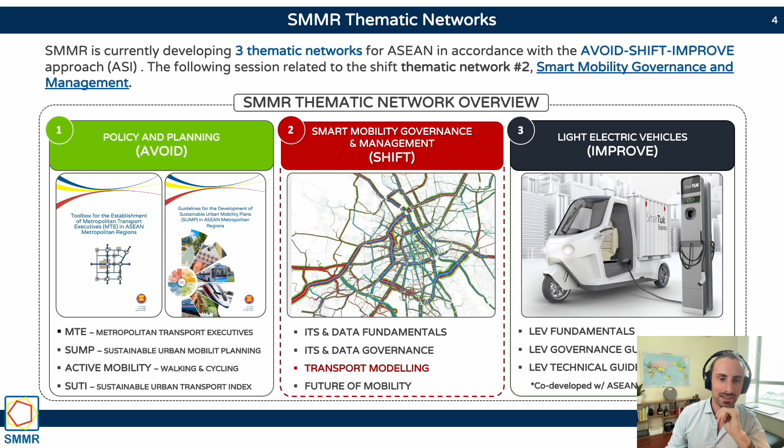So let's get into the modeling webinar. Today we will introduce you to modeling. We will cover theory and look at some practice, in three different steps: what is modeling and why it's important, modeling use cases and case studies, and data requirements. Then Paul and Sharan can also give you some insights into the user interface and other PTV tools.

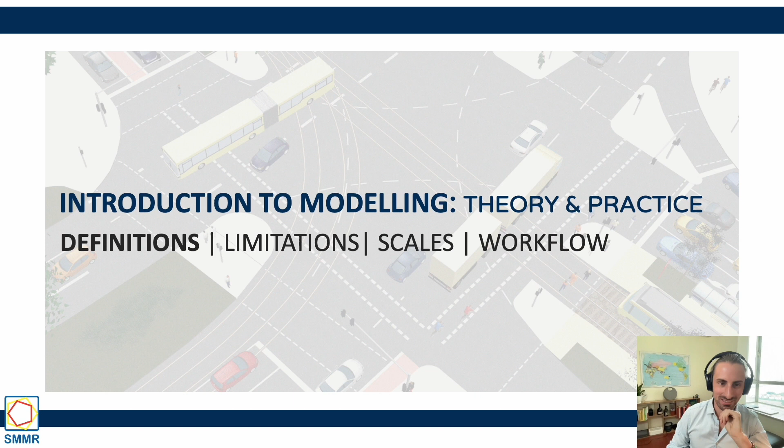Let's start with the very basics, covering some key definitions. So what even is a model? You can give it some thought, any ideas? Essentially a model is a representation of an object or system, a simplified version of something, and we come across models all the time.

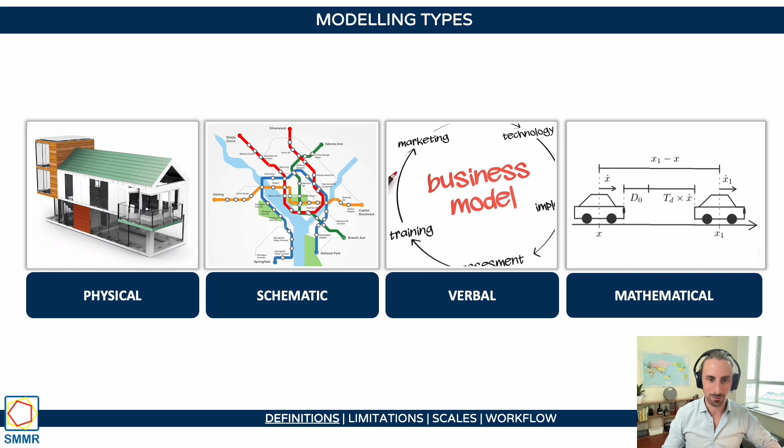There are many different kinds. We have physical models, which could be an architectural mock-up, or schematic models, like a public transport map, which is a representation of the real world public transport system simplified into a map. We have verbal models, like a business model, which is a representation of a business written up in a verbal document. And then we also have mathematical models, which is what we'll be looking at today. I don't want the word mathematical to scare any of you. We have excellent tools that mean it is possible to develop these very complex models without using any complex mathematics.

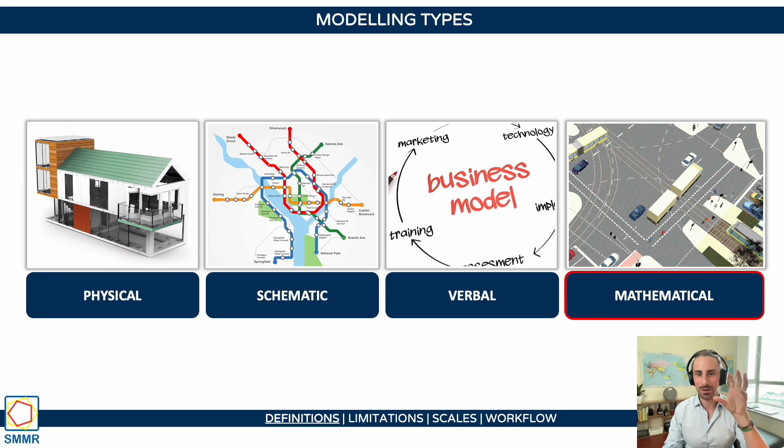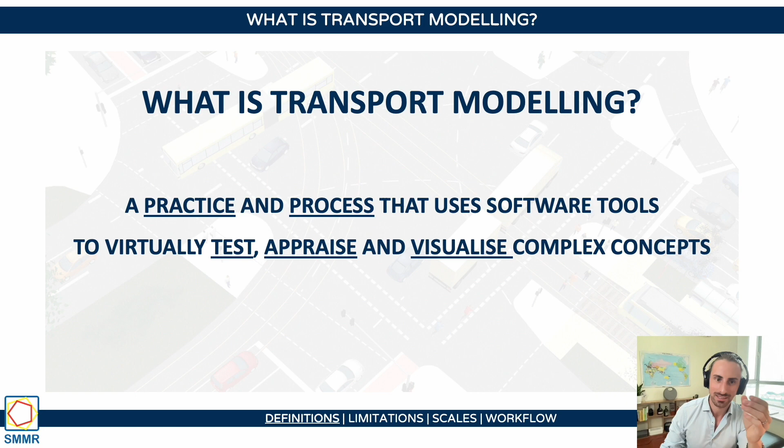But mathematical models make up transport models. So what is a transport model? One definition is it's a practice and process that uses software tools to virtually test, appraise, and visualize complex concepts. That's very useful - the world is becoming increasingly complex, and if we have tools that help us find comfort in this complexity, that is a good thing. So why do we model transport?

To find comfort in complexity, or the more academic explanation, would be to balance the supply and demand of transport systems in the present, but more importantly in the future.

You can get a general idea of this, at least from a transport perspective, using a modeling solution. But also using this solution, you can design, test, appraise and evaluate different concepts and solutions to absorb the growth in demand. For example, you can increase the supply of road infrastructure by adding new roads or new lanes, or preferably by increasing the amount of public, bus and rail-based transport. All of this can be done in a modeling solution.

It's worthwhile saying modeling software is not cheap, maybe compared to GIS tools, or you might be familiar with the price of Photoshop. These are far more technical tools, and they do sound expensive, but they are significantly less expensive than making mistakes. Road building and infrastructure construction is very costly, and mistakes can cost. So it's really worthwhile making use of these tools so you can test, define and refine your concepts all in this virtual environment.

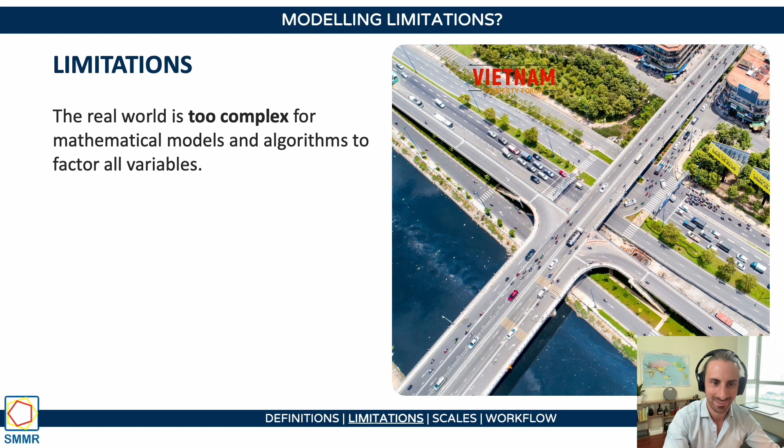But modeling isn't perfect. There are many limitations. The real world is very complex, especially in the ASEAN region. Mathematical models and algorithms can only go so far. They can only factor so many variables, but the real world is really so complex. This is an aerial image from Ho Chi Minh City, and if you've been there, there's a lot going on. Creating a model that factors all that is challenging, but it is possible.

These tools are continuously improving and can be increasingly customized to reflect different realities. But at the end of the day, these models remain only approximations of reality, even though they're always improving as we get better at collecting data and building and increasing the precision of our models. Despite these limitations, we have to consider the risk of not modeling. Really, models are not perfect, but they're the best thing we have available to us today to make these big, complex decisions. That's a little bit of theory.

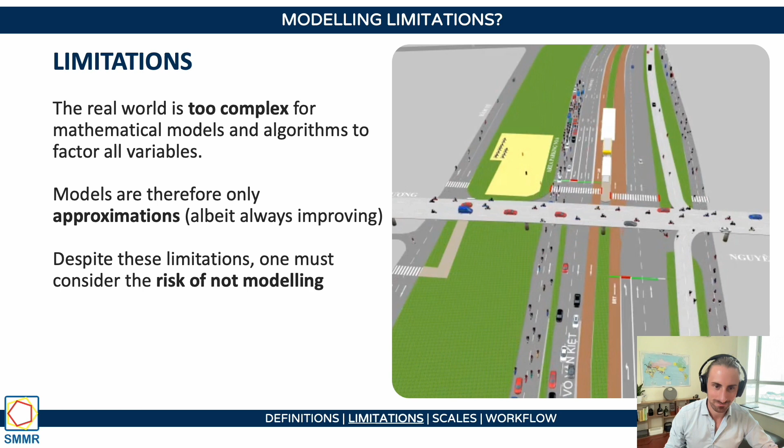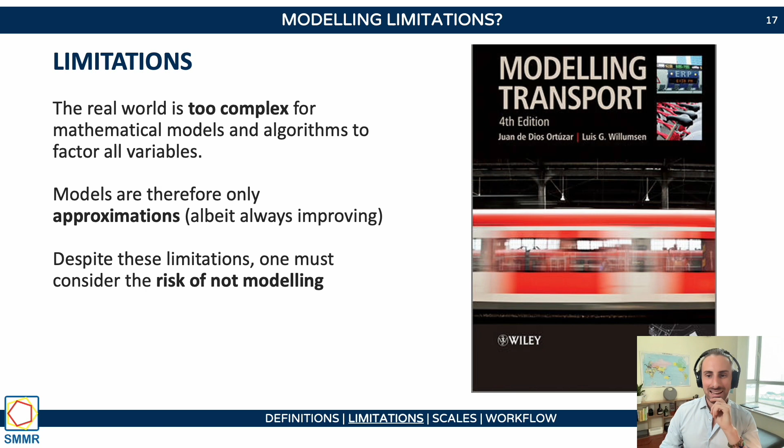These models are usually link-based. All the information is stored in links. You don't see agents, vehicles, anything like that moving around. It looks a lot more like a GIS interface.

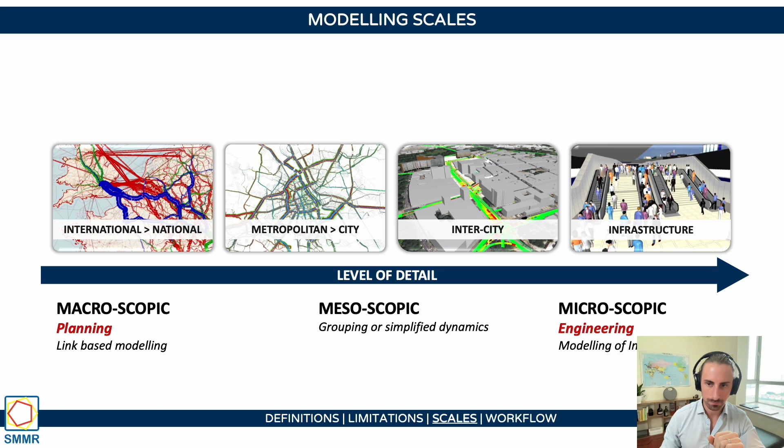Then if we move down the scale, we have a mesoscopic scale, which I won't go into detail on today. And on the other end, we have the microscopic scale, used for transport engineering purposes. These are also models, but commonly referred to as simulation tools. In these models, we model individual agents, and I'll explain that in more detail in a few slides.

PTV, who is here with us today, has different solutions for all the different scales. There are many companies out there, but PTV is the only one that has the whole suite of software across the different levels of detail. The solutions are more or less integrated, so Visum models can be imported into Vissim, and Vissim and Viswalk can coexist in the same interface. It's nice, and you can have a good workflow between all these different solutions. I'll show you another example of that later on as well.

So just to make it crystal clear, Visum macroscopic modeling for planning purposes is link-based, or also node and zone-based. The link is essentially a road, a piece of road, a line in the software. A node is a grouping of lines, and a zone is a larger area, a larger grouping. You'll hear these words throughout the presentation. Then on the other end of the spectrum, we have PTV Vissim for transport engineering purposes.

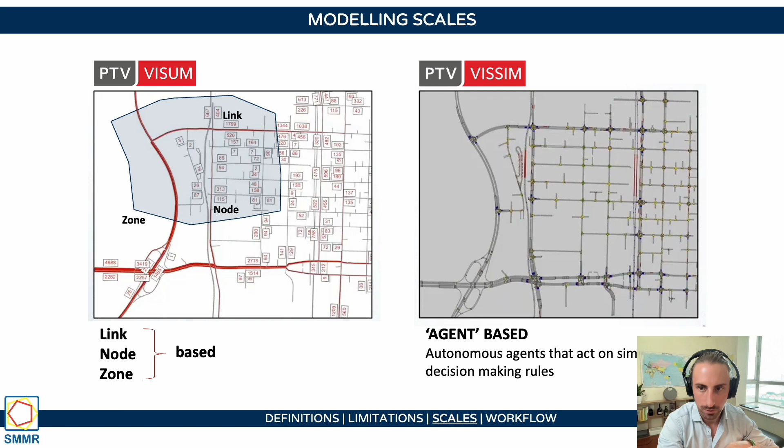That is agent-based, and agents are autonomous agents that act on simple decision-making rules. So you have literally individual people and vehicles, and they move around and adapt to their surroundings. So it's much more granular.

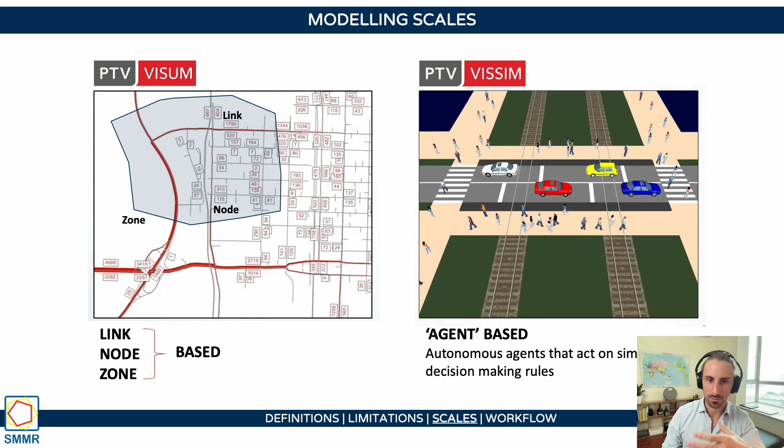Both macroscopic and microscopic modeling have their own workflows, but they can be simplified and can be very similar. The typical transport modeling workflow looks a little bit like this.

Here we have a hypothetical project location, and you are the planner, the designer, or the engineer, and you are asked to improve this particular location. It's a roundabout that looks a bit like an island. It's nice, but I'm sure it's not very pleasant accessing this piece of public space. Once you're there, you can hear traffic the whole time. So maybe there are ways it could be improved. Say that is your job.

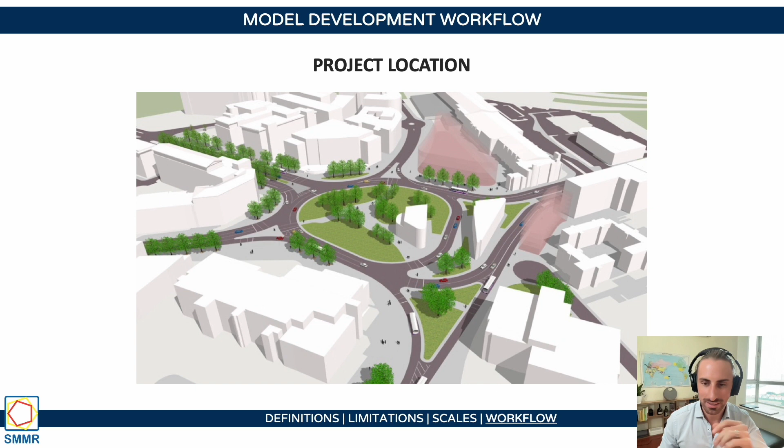The first step for you is to develop a vision of how the space could be improved. Your vision could involve improving pedestrian mobility, beautifying the space, giving public transport priority, and improving the ambient air quality in this particular location. And how can we do that?

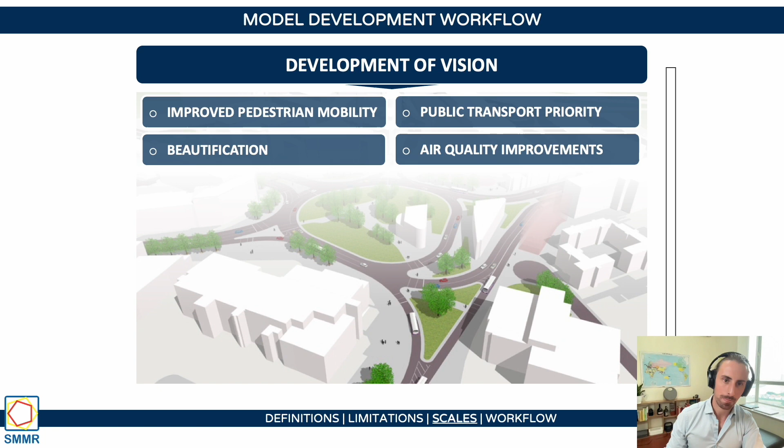Well, the next step is to build the base model. A base model is essentially a model that reflects the existing situation. And for this, we need to collect data, up-to-date data from this particular place.

This data will typically include traffic counts, so the number of vehicles moving through this road network, and turning counts, so how many vehicles are turning where. You will also need road network information, so information on the road geometries, the number of lanes. The traffic light information is also useful, and also information on vehicle compositions, so which kind of vehicles and how many are driving through the network - how many heavy goods vehicles, trucks, motorbikes, cyclists, cars, etc.

And then useful but not necessary is also 3D objects, which you can use to create a nice visualization of your project or vision, or your base model in this case.

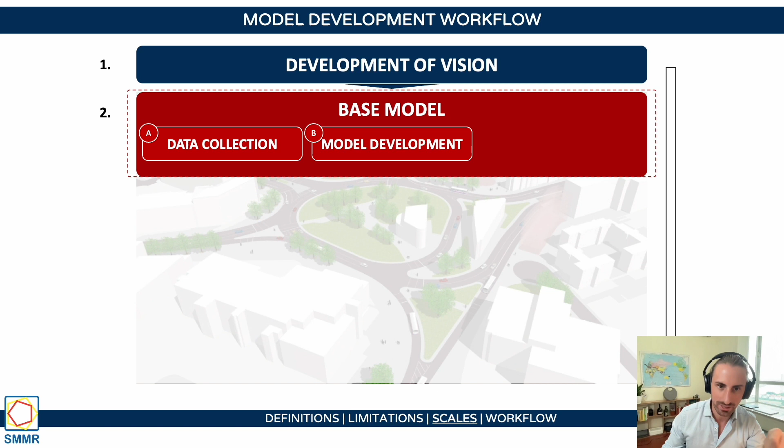Next, we develop the model using the data we collected. And lastly, we calibrate our model, which is the process of making sure that our base model developed in Vissim reflects closely what happens in reality. You can do that by comparing your model with, say, video footage and tweaking it and adapting behaviors so that it closely reflects reality.

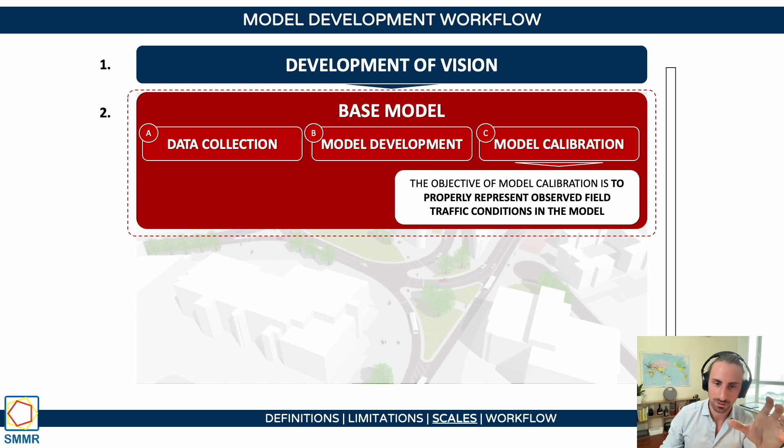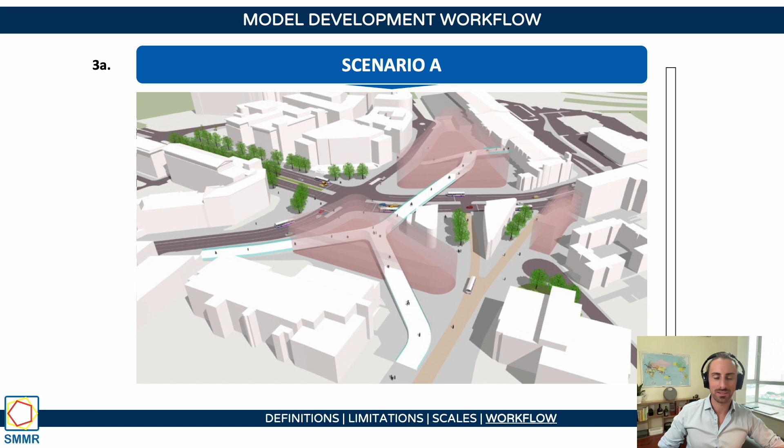So once you have your base model, the next step is to develop scenarios. Let's keep it simple - we'll look at two different scenarios, A and B. In scenario A, this is the idea the planner, engineer, or designer has come up with, and it involves creating this pedestrian overpass with smooth, low-grade access ramps, and there's also space for real estate development. There's significantly less space allocated to vehicles, but it's not particularly pleasant, so I don't know if it's the best in terms of beautification. So let's consider another scenario, scenario B.

Here in scenario B, we have an elevated park that would really remove people from the roadway. I would consider this to be a much nicer looking option, probably much more costly.

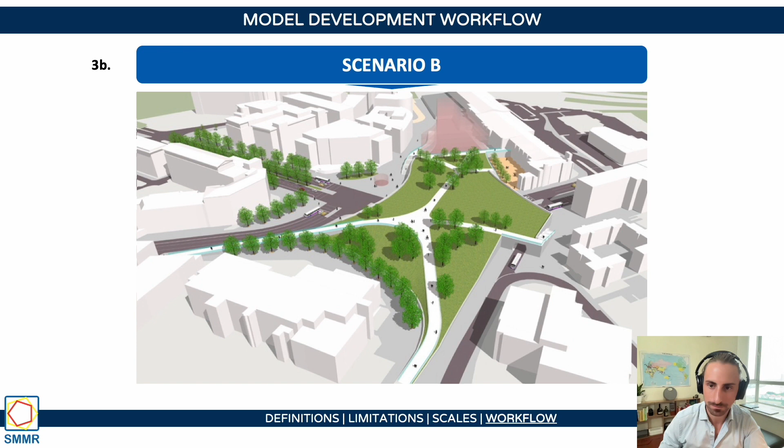And once you've developed your two scenarios, the next step is to test and evaluate these scenarios. In Vissim, you can test your network performance, the travel time it takes to move through the network, the delays, the queues, and all of this you can compare.

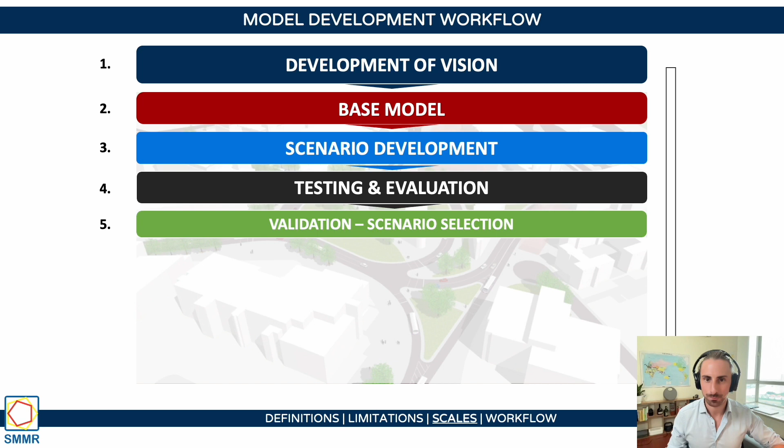And then the very final step is to validate and select your preferred scenario. So this is just one example - it's not highly technical, and your final scenario selection could look something like this. So this is all built in Vissim.

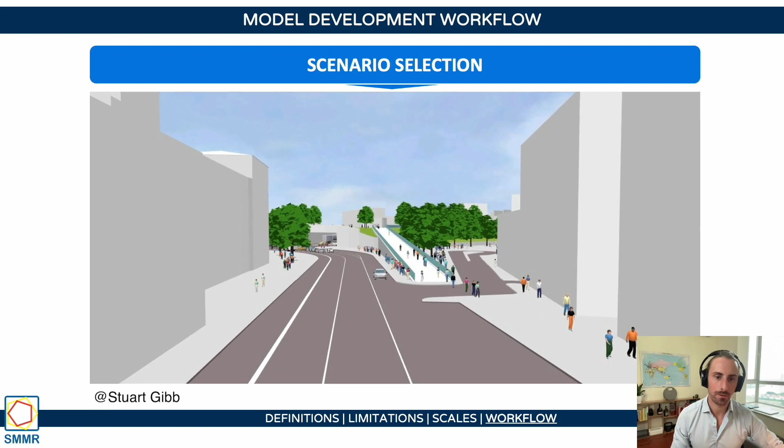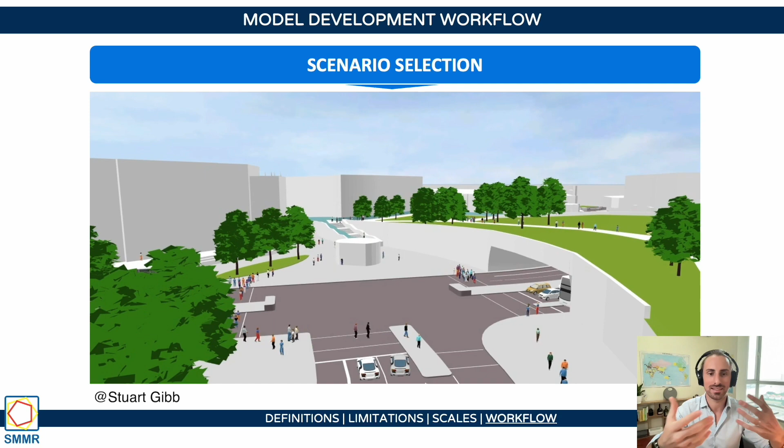However, the modeler has also built some 3D objects in Google SketchUp, so the buildings in the background, which don't add anything to the scientific validity of the model, but it just looks nice and creates a nice output which you can use to communicate the project to the public or to the mayor.

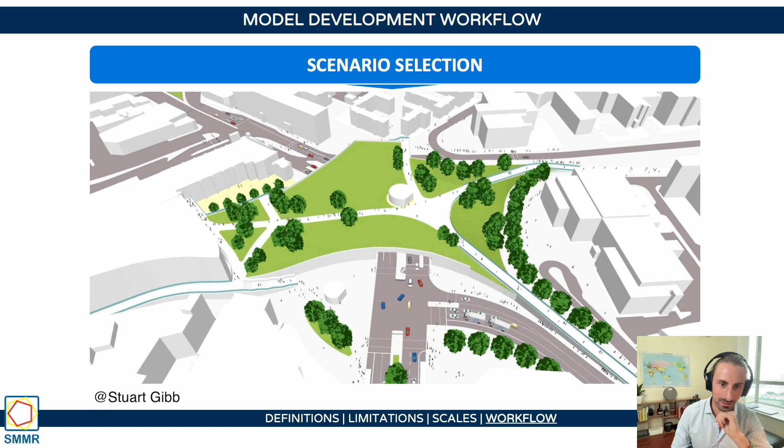And this is all built using real data that was collected in the base model. So that was the workflow. Now I think we can look at a couple more use cases and case studies for Visum, Vissim, and Viswalk.

And we begin by looking at macroscopic modeling use cases in PTV Visum. PTV Visum is a software solution that can be used for traffic analysis, demand forecasting, planning public transport services, and GIS-based data management. So if you're not familiar with these, or it doesn't make sense yet, I will give examples for some of these.

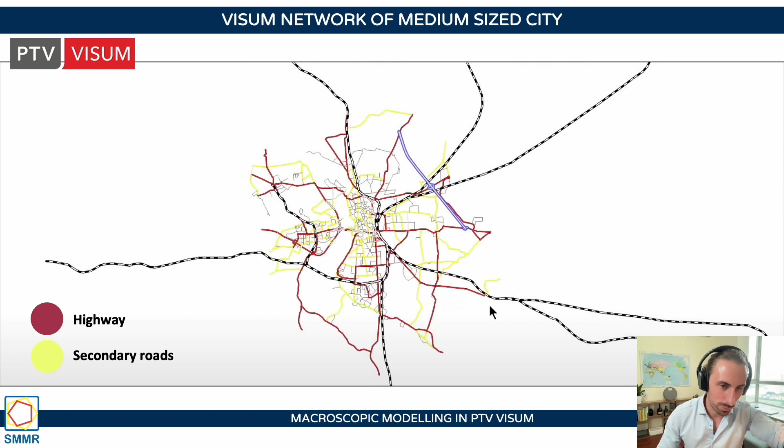Here in brownish purple, we have the highway. In yellow, we have secondary roads. And when you click on an individual link, you can see information from this link.

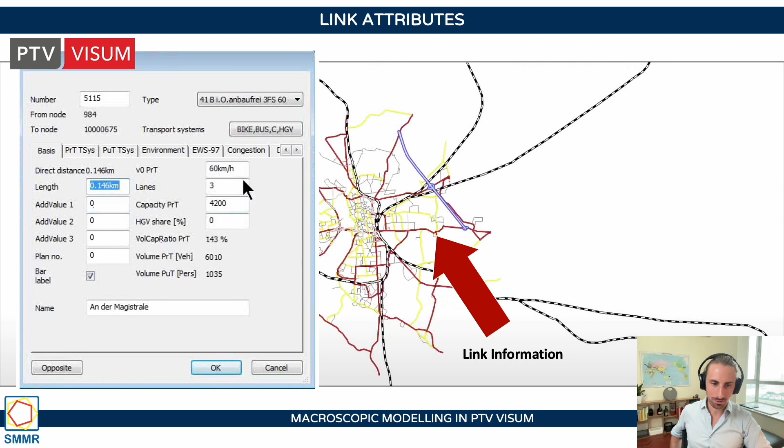Here you have lots of different attributes: the link name, which could be the street name or just an ID number, the length, the number of lanes, the capacity, the speed one can drive on. All of this information gets stored in the model.

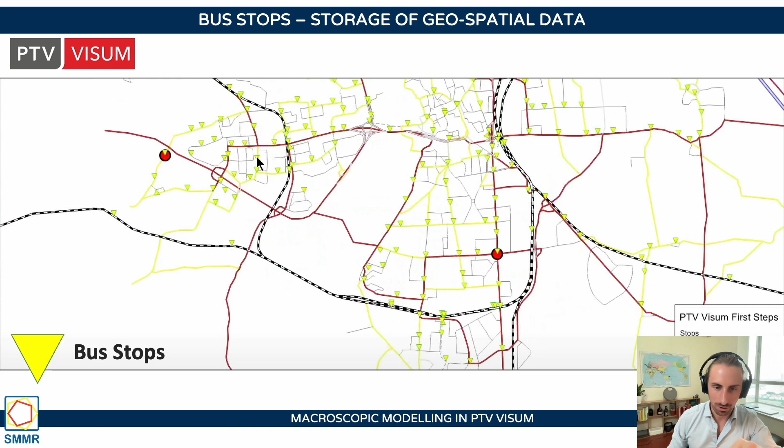You can also view all the public transport stops. Here the triangles are the bus stops. So it really serves as a space for storing geo information, but it can do much more.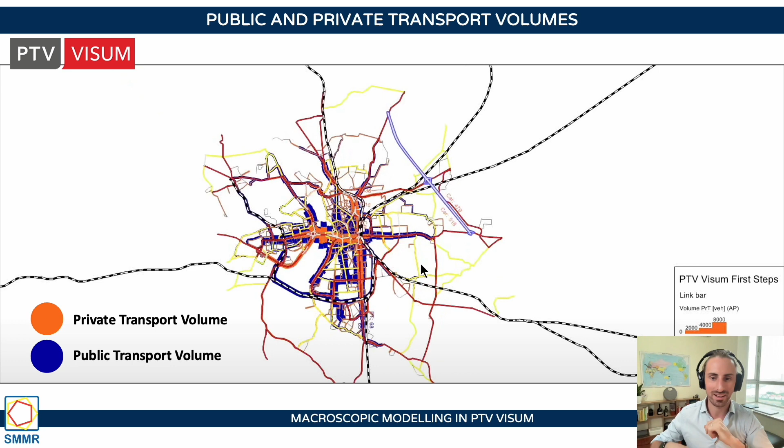You can also run assignments. And when you run an assignment using origin destination data, you can see the volume of transport on the different links. In orange, we have private transport. In blue, we have public transport, and the thickness of the bar represents the volume.

If we zoom in, you can see here private transport: we have 5,500 vehicles driving on this link, and 1,002 public transport riders, not vehicles, moving across this link.

You can do a number of different visualizations. You can see the extent to which they're moving at free flow speeds, etc.

All of this volume information is based off an origin destination matrix. Actually, in this case, two origin destination matrices: one for public transport and one for private transport. This is essentially what the matrix looks like.

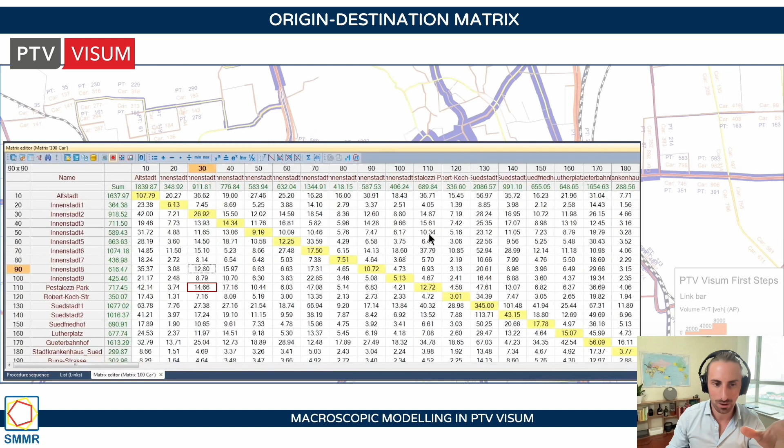Just as an example, from Pestalozzi-Park to Innenstadt, the city center, there are 14 vehicles moving from this node to that node. I'll explain in more depth later on where and how this data can be collected.

With this OD matrix methodology, the model knows the origin and destination of a person, a data point, but it doesn't necessarily know how they get there — the model will calculate that. It doesn't know which route they will take, but generally a rider will take the shortest route available, a factor of distance and time. Distance in a congested urban area becomes less relevant, so it's mostly a factor of time.

One of the many applications of Visum is to plan upgrades to the transport network. In this example, we can use Visum to introduce a new bridge and assess the impact this bridge would have on overall network performance.

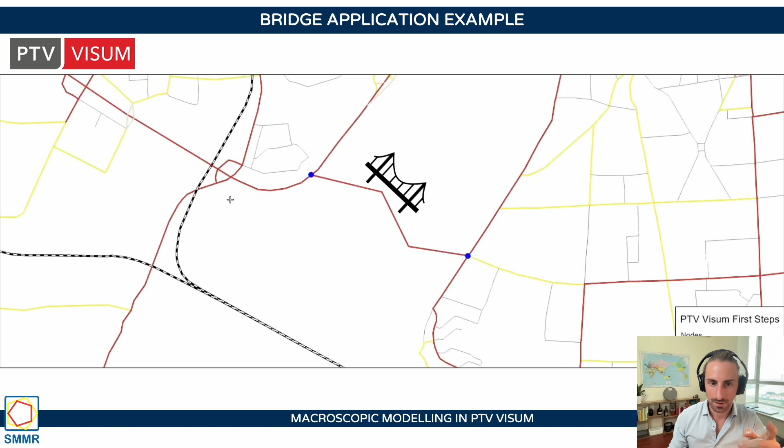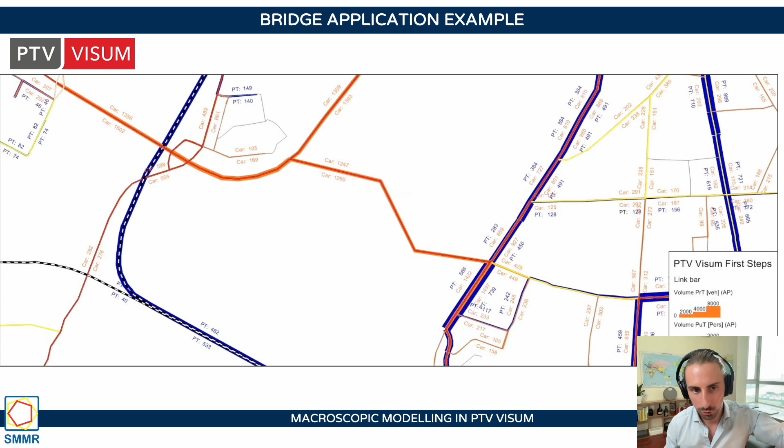This is very quickly done. You can draw new links and connectors and create a new bridge. Then you rerun an assignment, and in a matter of seconds you will know the demand on the new bridge, and also see how demand has shifted from other locations in the network.

So you can appraise the impact this bridge will have on overall network performance, and decide whether or not it's worthwhile, or make decisions on how many lanes this bridge should have, and so on. We can do all of this without doing any complex calculations — the software does this for us.

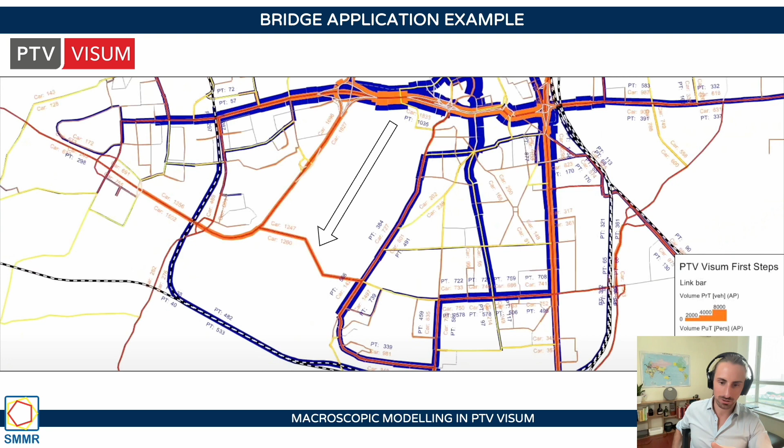Visum can be used for a wide variety of applications. It can be used for road infrastructure planning, like we just saw, by introducing a bridge. It could have been a new road, a ring road, a tunnel, or adding a certain number of lanes in different locations. Or it could be used for demand forecasting.

This could be our base model, with certain assumptions about what's going to happen in the future. We can understand how the network performs factoring in these forecasts, and look at different interventions, again going back to new road infrastructure planning, to absorb this capacity.

Visum can also be used for public transport planning — creating new public transport routes, changing public transport schedules, or understanding fleet requirements of your transport system in the present and in the future.

That's everything for Visum today. Visum is a very powerful tool, and we could do an entire series on Visum, so maybe in the future. For now, we'll leave it at that, and focus on microscopic modeling.

Back to microscopic modeling, we have the tools called Vissim and Viswalk. These are traffic engineering simulation tools — Vissim for vehicles, Viswalk for pedestrians — and these are fully integrated. You can use them for a wide variety of applications: simulating private transport, public transport, active mobility, parking, traffic signals, simulating vehicle emissions, and this tool also offers nice 3D visualizations.

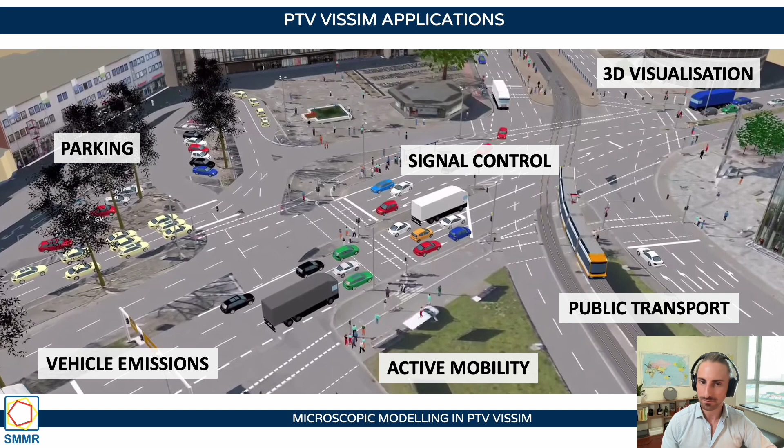Vissim is based off the car following algorithm, known as the Wiedemann car following model.

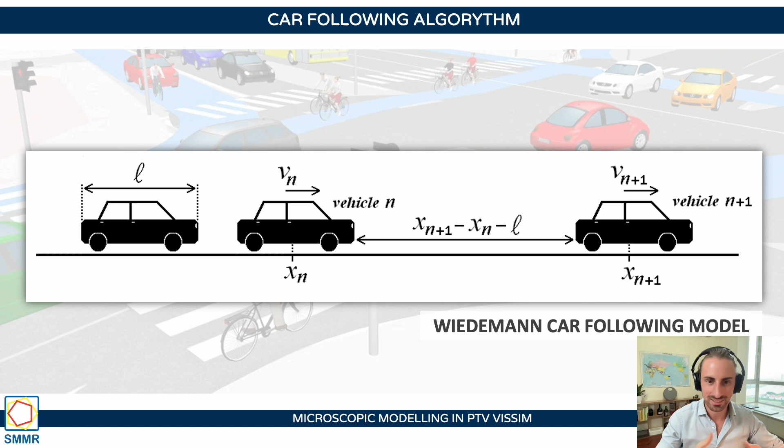You don't really need to know this, but it's worthwhile having a basic understanding of how vehicles move. Vehicles don't drive at a constant distance from each other's bumpers - they get closer and move away depending on behavior. Same goes for turning behavior, and this differs from country to country. In some countries, people drive more aggressively than others, and this algorithm can be tweaked and adapted to local driving conditions.

Looking at PTV Viswalk, this is a pedestrian simulation tool with its own algorithm. Humans move very differently to vehicles, so the car following model is used for all vehicles, including bicycles, which can only move forward and backwards and then turn. Whereas people can move in all directions and behave very differently to vehicles. In Viswalk, the movement of people is based off the social force model, a different kind of algorithm, and this can also be customized.

People prefer different levels of personal space in different parts of the world. In Southeast Asia, people seem to be less discontent having people close by compared to, say, a Nordic country. In Norway or Sweden, people like their personal space much more - if someone gets within 2 meters of you, you start to panic. Whereas in Southeast Asia, that's not so much the case. All of that can be customized in the model.

This obviously differs depending on the setting that you're in. In tight spaces, people move and adapt differently, and that can all be emulated in Viswalk.

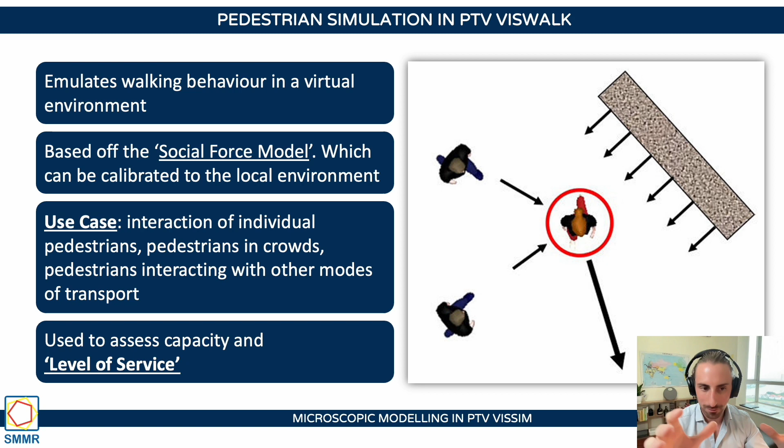This will not be free flowing - people will be tripping over each other, so level of service F is not good. C is acceptable - it's slightly restricted, but comfortable. So when planning an infrastructure, it's good to aim somewhere between B and D.

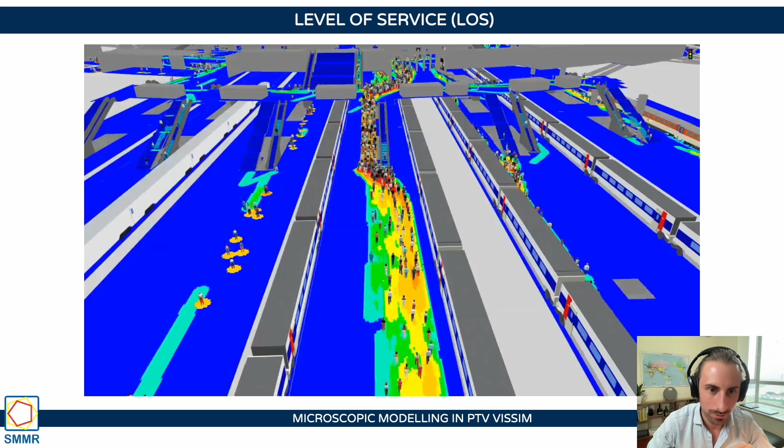Here we have a nice example of a train station and a big multimodal interchange. You can see as the pedestrians alight or disembark from the vehicles, you can see the level of service. Here, for example, there's a level of service F - there's a bottleneck forming before the stairs. So if this is a plan and this has not yet been built, maybe the architects could consider widening the staircase so there's more throughput.

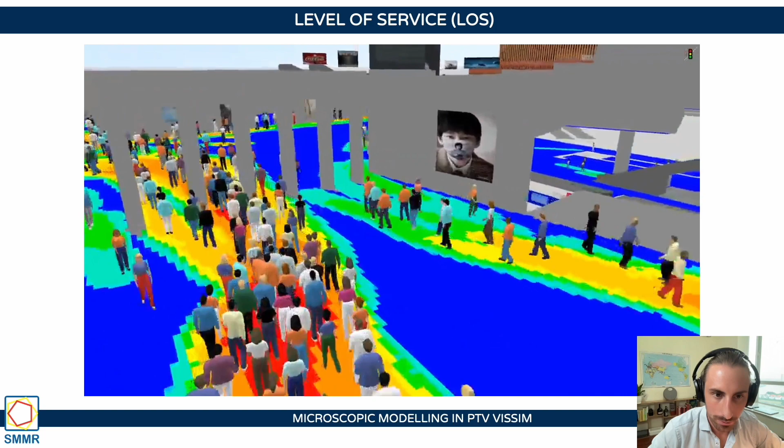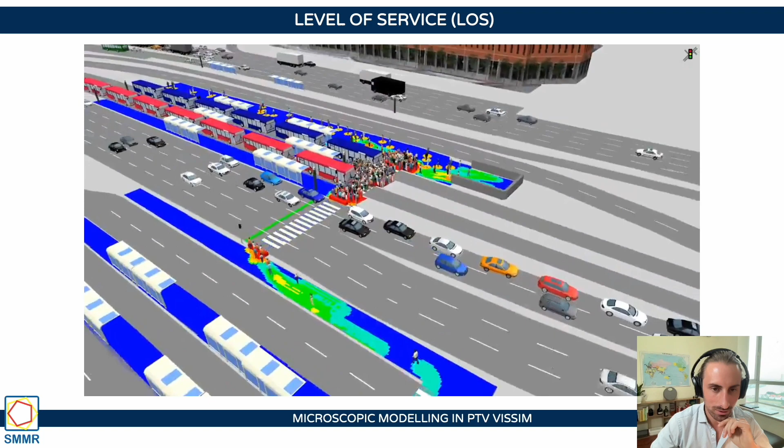And here as well, there's a very poor level of service, so maybe there's some spatial modification or intervention that could be brought in to improve the flow of people. But then overall, in the rest of this space, there seems to be a decent level of service. Pedestrians are leaving the station and interchanging onto buses, and it's quite neat - you have a good mix of public transport, pedestrians, and vehicle-based transport. This particular example uses Vissim and Viswalk.

Different use cases and applications for Vissim and Viswalk, or specifically Viswalk. One could be to do capacity analysis. So if you're designing an airport, you might want to know at a certain time of day, maybe at peak hour, how many passport control checks do you need, how many security bag checks do you need open? You could use a tool like this to appraise that.

Or you can use it for multimodal engineering to model the interaction of people from a public transport system, moving through a road-based network and entering a car park. Or you could use these tools to plan an event, to understand the movement of people to and from a stadium, or to evacuate a stadium, and to determine if you have enough exits for people to exit in a timely fashion to avoid any major incidents.

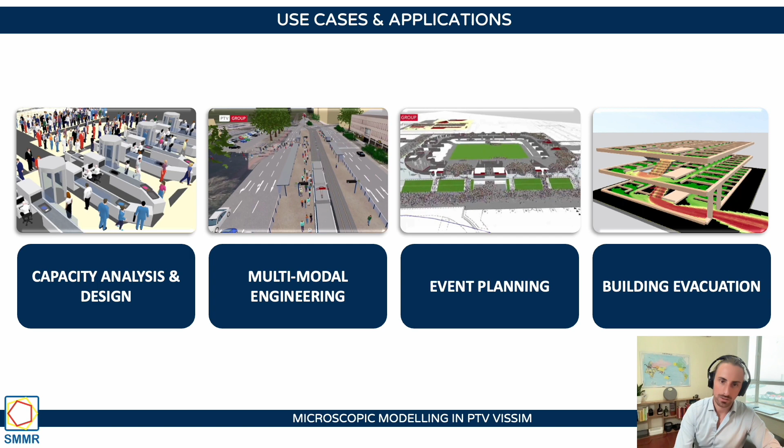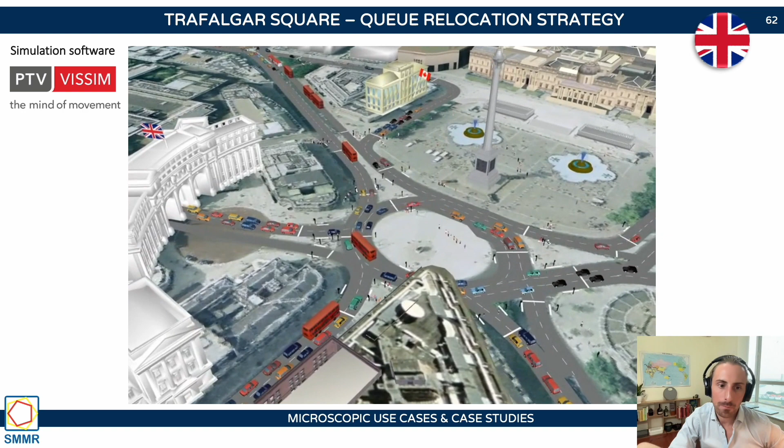So they reprogrammed the traffic signals. Basically, all the traffic signals in and around this roundabout can detect the threshold - how many vehicles are waiting to move through this space. And when these traffic signals reach, say, a 60% threshold, they send a message to the traffic signal upstream saying, hold traffic back until I can get closer to free flowing speed.

By using the network of traffic signals to hold traffic back at less critical locations, they can ensure that the flow of vehicles here is always smooth and constant. And all of this was tested and proven in Vissim before it was implemented in the real world.

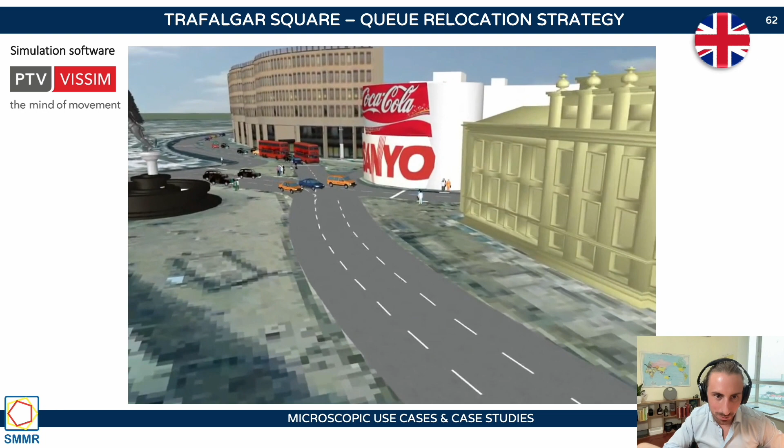And so today we have a nice public space. We have free-flowing traffic, more or less, in the foreground and around the roundabout, and the traffic signals are all optimized in these locations. Of course, this coupled with big investments in public transport has made it possible to keep growing the city. But modeling has played a very important role in increasing the movement of people while working with a very limited amount of road space.

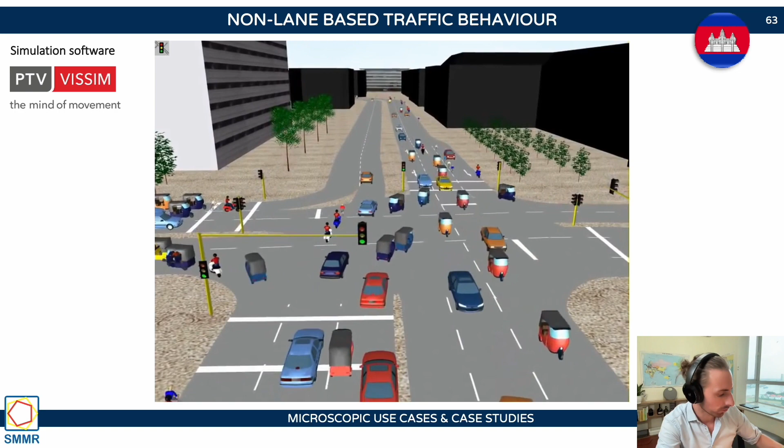Here, I think it's important to show you more local examples. This is a model showing non-lane-based traffic behavior. In many cities in ASEAN, vehicles do not abide lanes as they do in some European cities. So in Vissim, by the tick of a button, you can switch off lane abiding behavior, and vehicles now, whenever they see a safe enough gap, will move into it. This much more closely resembles what happens in Phnom Penh in Cambodia, where I'm currently sitting, and the model has this type of functionality.

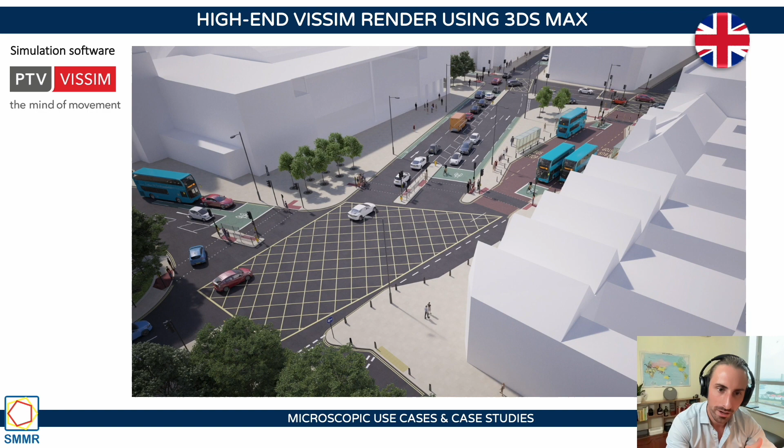Now, I just wanted to show you how you can do some high-end visualization in Vissim. This is another project where the public realm was improved, again using a roundabout and giving pedestrians more priority at this particular location. The tool was used to see whether or not this was viable and made sense, and also to get a sense of how it would look. This is all made in Vissim, but then it's rendered in 3ds Max, and you can get these very cinematic outputs. Now I'd like to show you briefly how these different solutions can be used together.

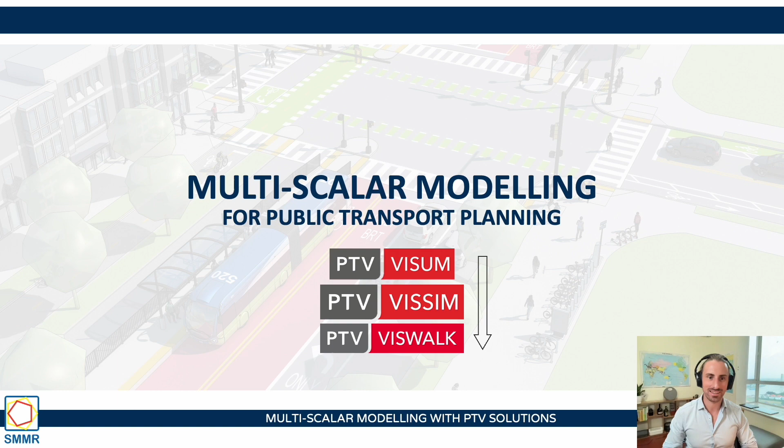So Visum, Vissim, and Viswalk, say, for one project. Let's take bus rapid transit as an example, a BRT system. We want to design a BRT system in our city. We can take Visum, bring in all the GIS data we have on the existing road network, land use information, economic information, and with that we can do some demand analysis, understand the different socioeconomic groups and where they live in the city, and decide where we can identify the optimal location for putting a corridor, and then planning this corridor.

And then once we know where our corridor is, we can do some preliminary rolling stock planning - deciding what kind of vehicles we would like and running an assignment to see how this performs, what the volume is, and how we can cater to the anticipated ridership.

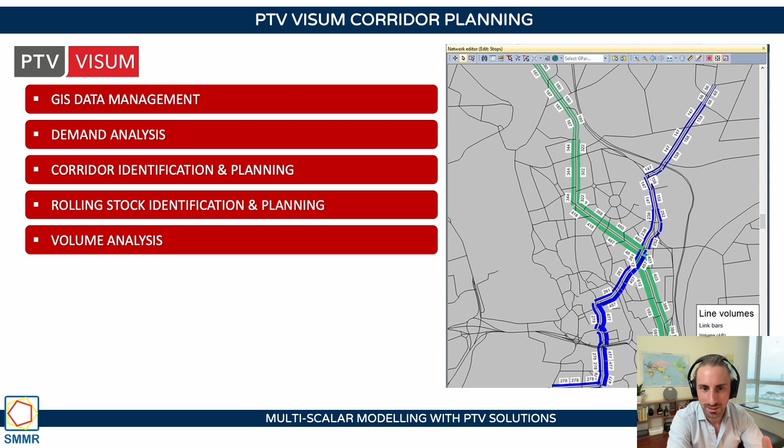Continuing with Visum, we can use it to develop our timetables and schedules. We can run through several iterations until we find a good timetable that really matches the supply of buses with the demand for trips for different hours in the day. You can do all these visualizations in Visum.

And once you know the demand and the supply, you can also design your transit fares accordingly and get a lot of information to help finance this kind of project, because you can use Visum to determine your return on investment and your payback periods. So it's a very powerful tool in that sense.

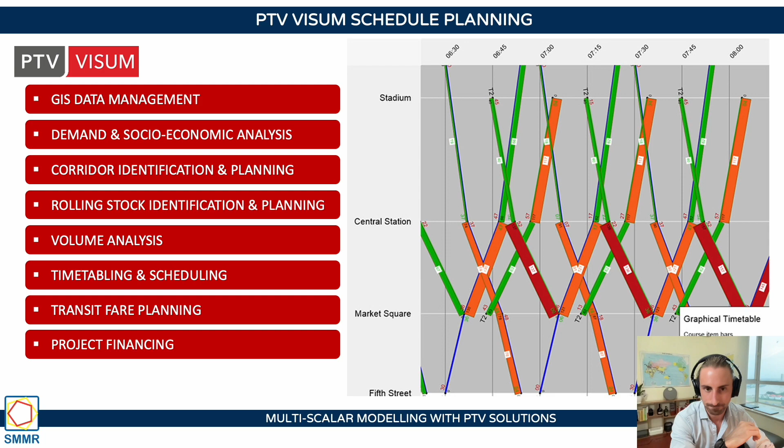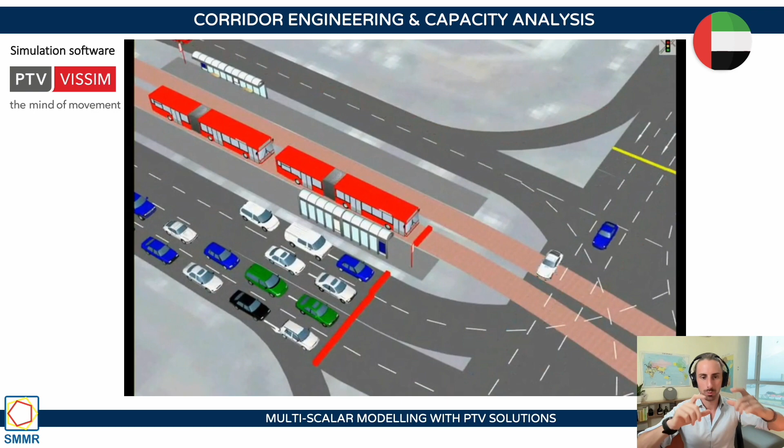Once you're done with your planning, you move over to the engineering stage. Here's a Vissim model from Abu Dhabi, where they wanted to understand the impact of introducing a BRT corridor by removing a lane of traffic. There's buildings on either side, so they were not able to knock down buildings, but they wanted to increase the throughput of people.

This is measured by PPHPD, which stands for persons per hour per direction. So with 3 lanes, this corridor can move 7,000 people per hour per direction. By introducing a high capacity bus, you can increase the number of people moving through this space by 3,000, so 10,000 people per hour per direction.

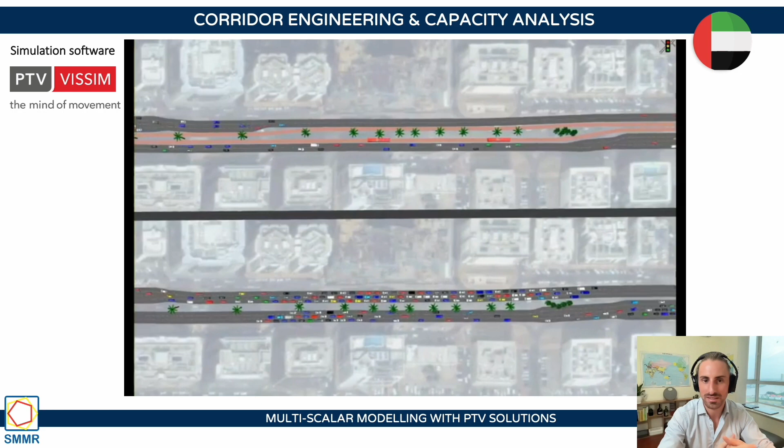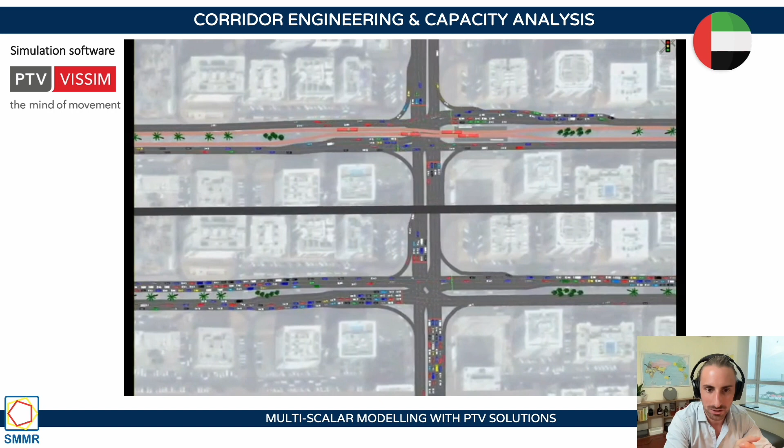A tool like Vissim is very powerful in showing that you can remove road space if you introduce a higher capacity alternative like a BRT system here. So I quite like this example.

Once you've done your corridor engineering, you might want to give a little more detailed attention to your intersections. With bus projects, you can give priority to the buses, so when they approach the intersection, they can communicate to the traffic signal and get a green wave. But the levels of priority can differ, and you can understand the impact of that.

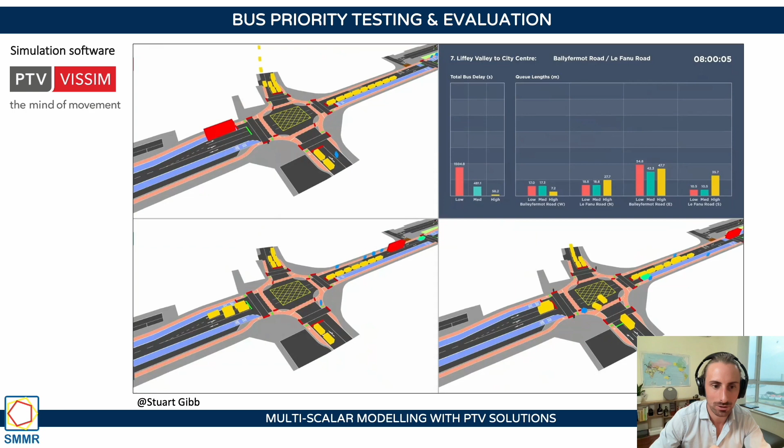That can make public transport more convenient, more competitive, and reduces travel time, making it relatively more attractive compared to alternatives. You can do all these evaluations in Vissim and watch how the different scenarios perform against each other. Again, with high priority, there are very little delays, so that's probably a nice thing to look into when designing this type of bus corridor.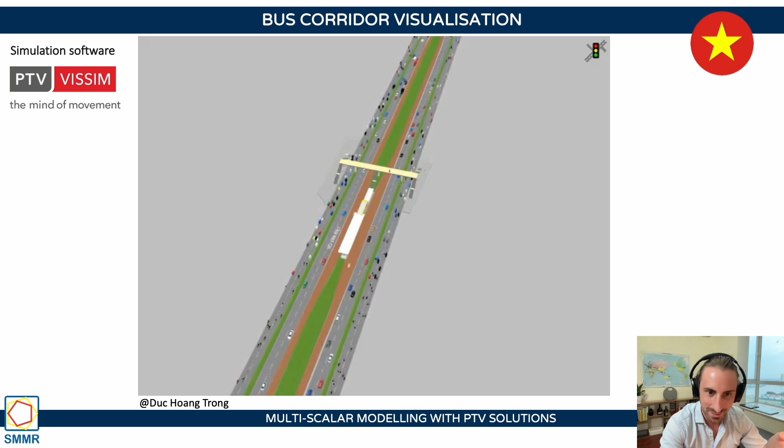This is just an example I found on YouTube of the Line 1 BRT corridor from Ho Chi Minh City. It's the whole pilot corridor in one model, which I think summarizes a lot of what we've spoken about. You have the BRT stations, parking, different lanes for motorbikes and vehicles, non-lane abiding behavior, and lots of pedestrians moving to and from the buses.

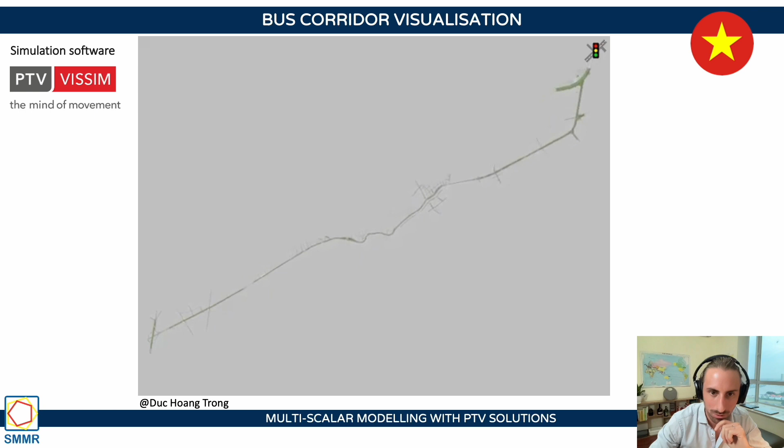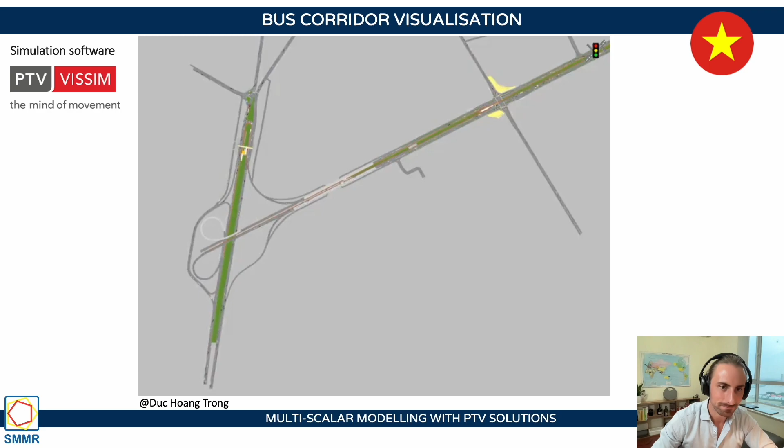Just another example, we can get more granular. You can also use Vissim plus Viswalk to design your station platforms. You may want to see how vehicles enter the stations, how long your stations need to be, how to bring in passing lanes if necessary, and how people access, board and alight the buses. All of that can be tested in Vissim and Viswalk.

This is an example from the TransMilenio in Bogotá, Colombia.

And then lastly, using Viswalk, if you wanted to get creative, you could also test the impacts of different bus designs. You could compare what would happen if your BRT system operated with a bus that only has 2 doors, or 80 seats versus 100 seats.

You could compare that. If you have more doors, people can board and alight quicker, which could make the service operate slightly faster or smoother and reduce potential delays. You could then appraise the economic cost of having an additional door and whether it makes sense over a long span of time.

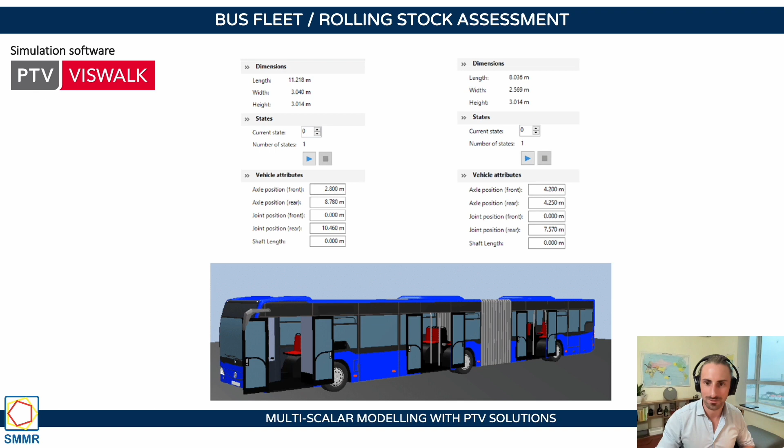Okay, so last section, it's worthwhile talking about the data required to build these models. We'll cover this for Visum, macroscopic modeling, and microscopic modeling. For Visum, we previously spoke about origin destination data, OD data, and there are traditional methods that have been used for decades.

To do an OD survey, you manually go out and sample a number of people around your city and ask them questions. From your OD survey you want to understand who uses the transit system, so you want demographic data, and why they use it—are they choice riders versus captive riders. Then information on when, where, how, and for what they use the transport system.

Here's an example of an OD survey form. You go out and ask people these different questions in different parts of the city, and you can build up a picture of how people move. It's very labor intensive, but it's the method we've used for a long time.

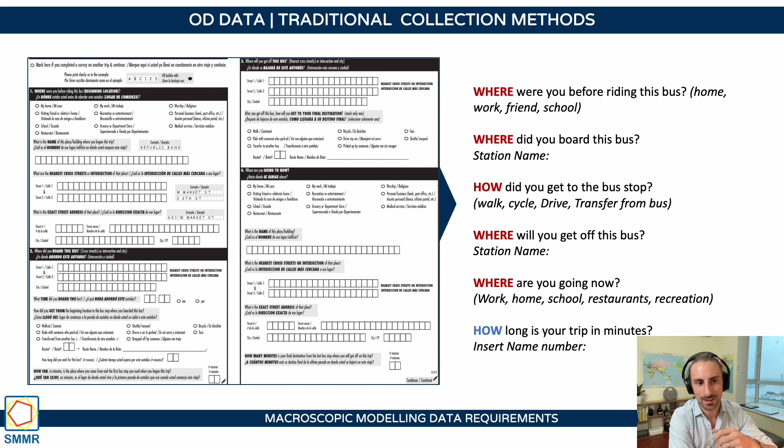That can be the case in cities like Phnom Penh, where I'm currently sitting—the city transforms on a month-by-month basis. So if it takes too long to collect the data, it will be less valid or no longer valid in the future, and that results in an oversimplification of reality.

So household surveys are somewhat outdated, but they still have a lot of value. There are, however, new methods to collect origin destination data. If you wanted to create a public transport model, you could source data from public transport smart cards, if that's something you have in your city. You can get information on people boarding and alighting the bus, so you know where people are going to and from, or if they're interchanging from an LRT or MRT to a bus. That data can be useful, but not everywhere has it.

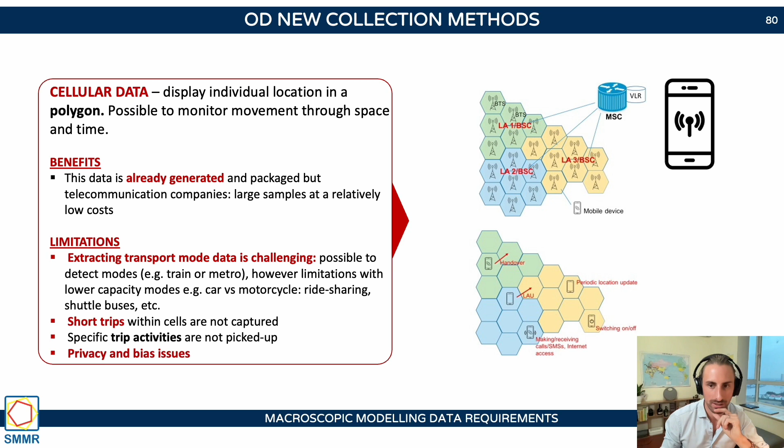So what is the best method? The best method is, I would say, a fusion of the traditional methods with the new methods. So surveys plus, say, mobile phone data, and you get a wide range of different kinds of data. In the Southeast Asian context, you use mobile phone data, existing land use data from OpenStreetMap, the public transport network. If you have existing GTFS data, that's great. Or you work with someone like WhereIsMyTransport, then you get some census data and survey data.

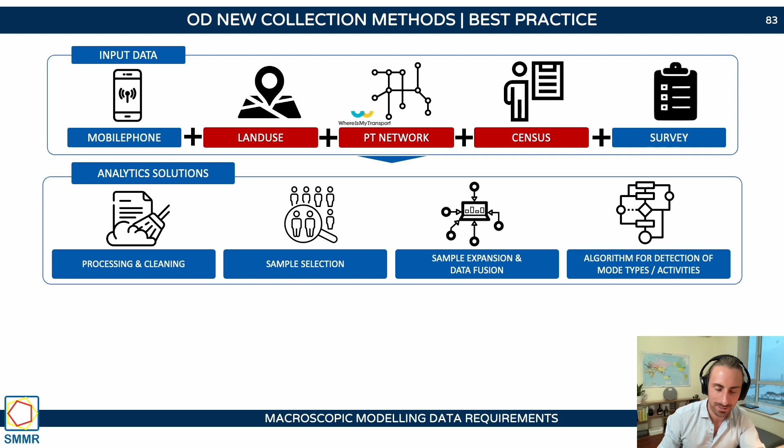And you bring all of this together, you clean it, you select the relevant samples, you expand on the samples, and you fuse all the different data sources, using different algorithms to detect different mode types if you're working with cellular data and the potential activities people are doing. So there's a big process of data cleaning, fusion, processing. And in your output you get a fairly realistic and robust travel demand model. Again, it's only an approximation of reality, but oftentimes this is sufficient for the work you're doing.

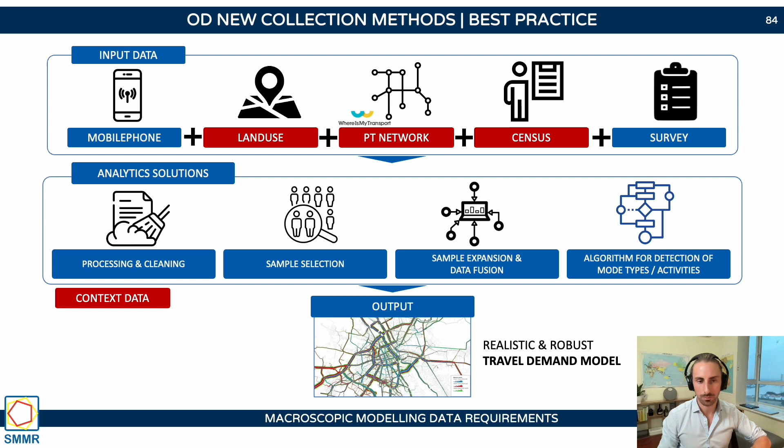There is another method if your city has existing ANPR cameras, and you can detect the movement of vehicles through the network based off their number plate information. That's also another option. And lastly, let's look at microscopic traditional data collection methods.

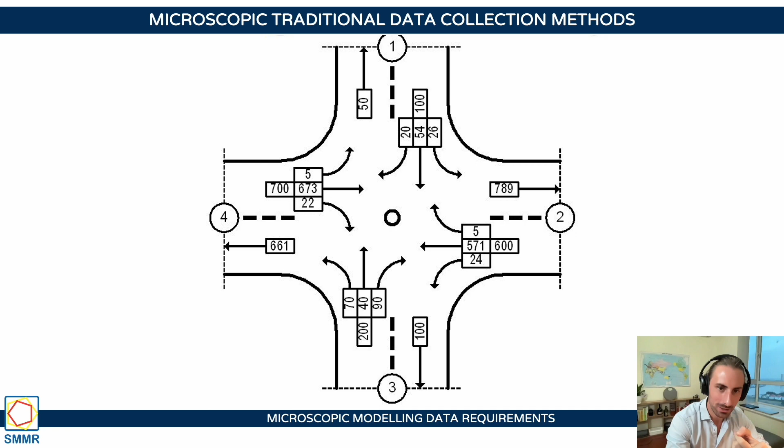So now looking at Vissim for traffic engineering, what kind of data do we need? It's quite straightforward. We need vehicle compositions and counts - how many people drove straight, how many turned left, right, at each and every intersection, and also what vehicle they were driving, and information on behavior, so how fast they were driving.

And this is the traditional method. You used to go out with a form and you would do counts and just check off how many cars you saw, how many trucks you saw, going straight, turning left, turning right, etc. Nowadays, there are more innovative methods.

So in Cambodia, we're currently working on a CCTV analytics project. Essentially, we trained an artificial intelligence to detect the different kinds of vehicles in Phnom Penh. This is an early example - here we can detect tuk-tuks, and every time a tuk-tuk drives through, we know for the period of time how many tuk-tuks drove through. But now it's much more sophisticated - we can do that for every vehicle type.

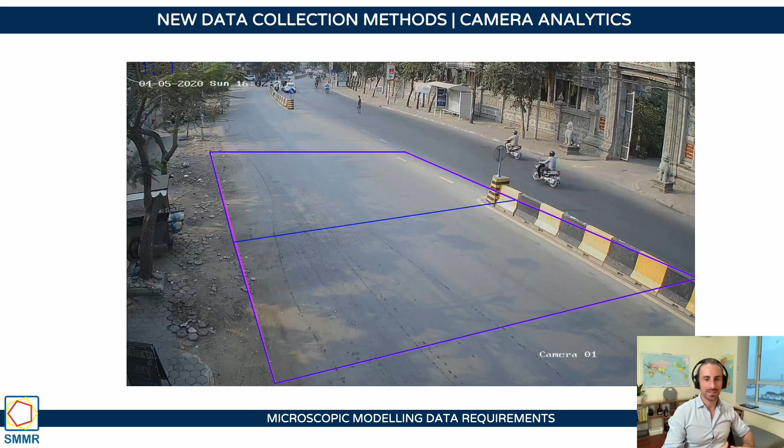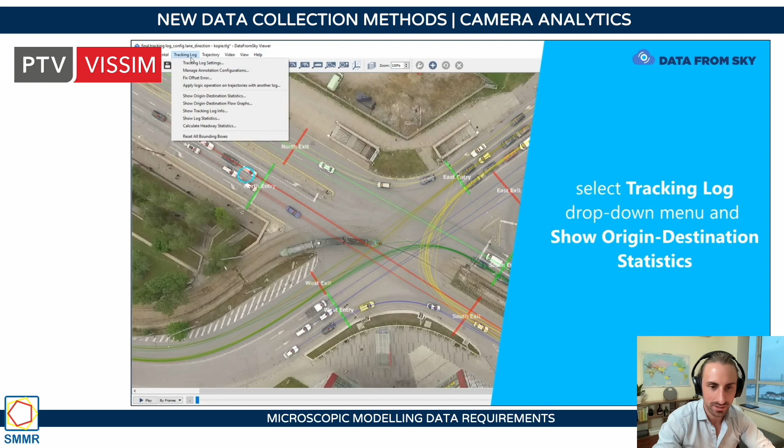So it's good you can leverage these new automated solutions, camera-based solutions, whether they're on a drone or set up on a gantry, or using existing police cameras that are on site. If you can get access to the cameras or even just a sample of footage and plug in your analytics solution to count, categorize, get vehicle speeds, that is one more, faster and more modern way to collect this kind of data.

Okay, that's everything from me.